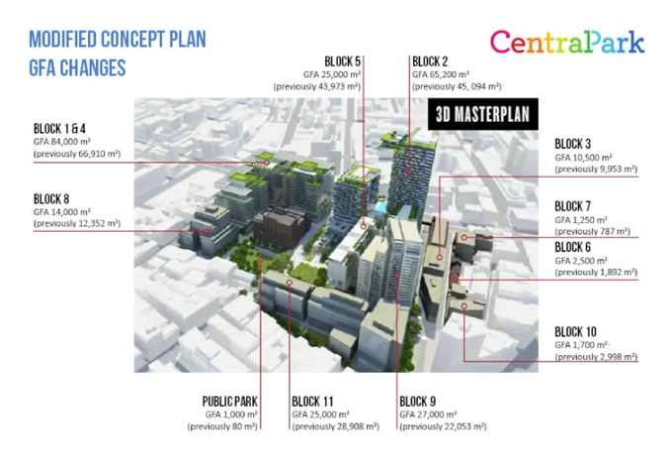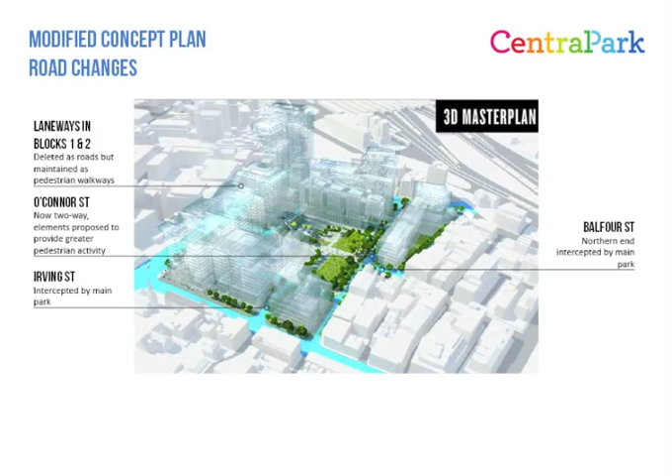As you can see here, the road changes for the modified concept plan generally encourage more pedestrian activity and less driving on the site. The next few diagrams demonstrate the land uses specified for each block.

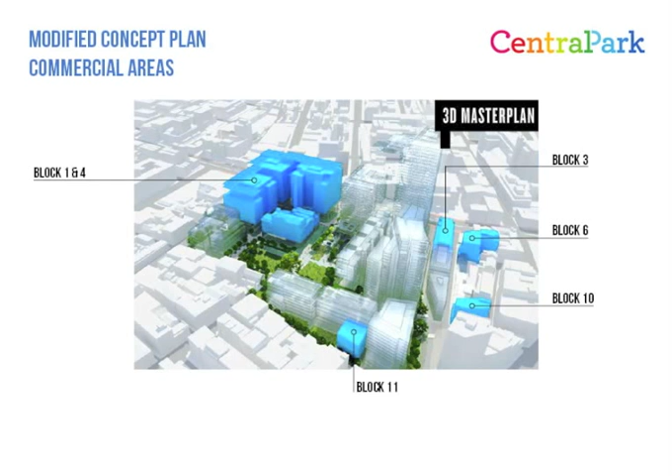The modified concept plan is an exemplary example of stakeholder-focused design. They increased the open space by increasing the GFA of the main park by 20% and enlarging Balfour Street Park, which won the Horbury Hunt Award for landscape in 2010.

The existing and additional floor space was shifted to the Abercrombie and Broadway street fronts instead of in the residential areas, and the increase in GFA was 9.4%.

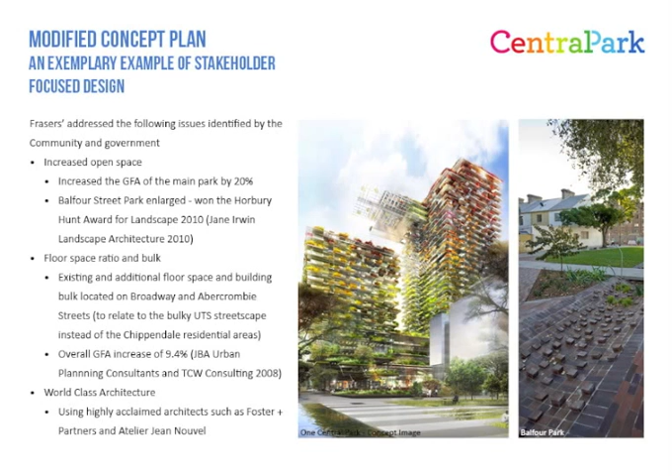They've also used highly acclaimed architects such as Foster & Partners and Atelier Jean Nouvel to produce world-class architecture. They have conserved heritage items from the original approved concept plan, such as the Brewery Yard Complex and the Australian Hotel, and reduced traffic by increasing walking and cycling pathways and reducing the number of entrance points to the basement.

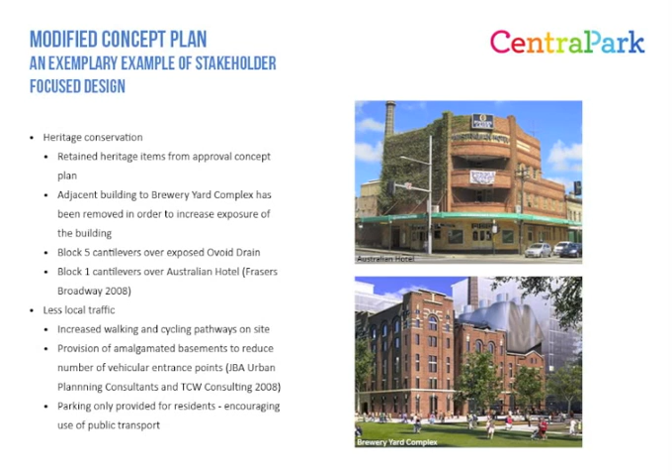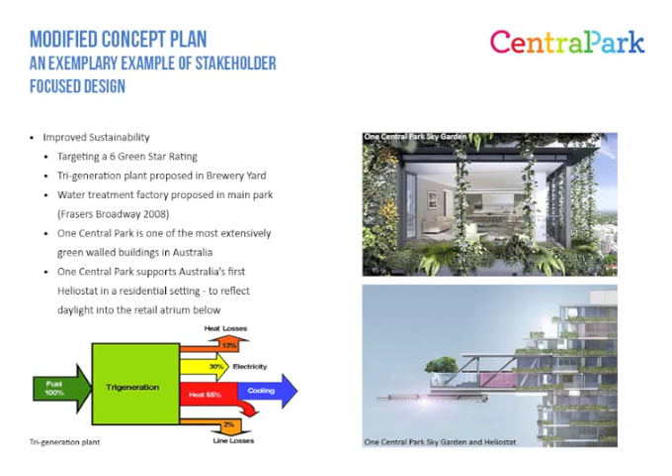They have improved sustainability by targeting a 6 Green Star rating, proposing a tri-generation plant on site, a water treatment facility, and One Central Park is one of the most extensively green-walled buildings in Australia, also supporting Australia's first heliostat in a residential setting.

Despite the small amount of criticism by community members that it's a gross overdevelopment of the site, we as the community feel that Frasers Property and Elton Consulting have set a new benchmark standard for the level of community and government involvement in major developments in Sydney.